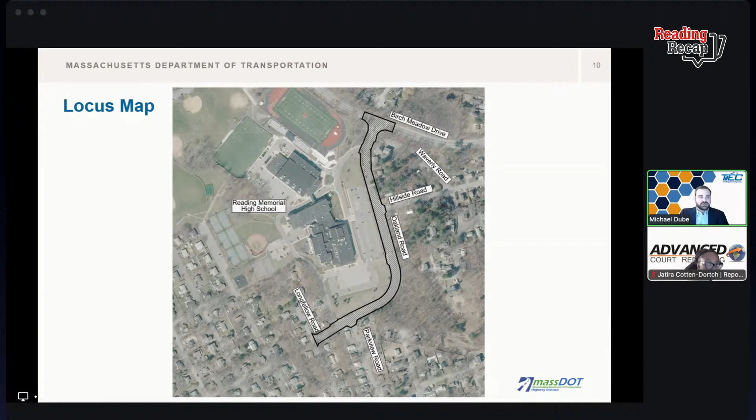The project begins at Longfellow Road in the south, and it extends approximately 1,700 feet along Oakland Road to Birch Meadow Drive in the north. The primary focus of the project is the area of Oakland Road adjacent to Reading Memorial High School.

Oakland Road today is a two-lane roadway with parking on both sides and sidewalks on both sides as well. The existing cross-section of the roadway lacks sufficient infrastructure for pedestrians and bicyclists, and there are excessively wide travel lanes which promote high speeds. Due to the on-street parking, poor sight lines for pedestrians looking across the roadway also exist.

The excessive pavement area also means there are excessively long crosswalks along Oakland Road. In addition, the intersections of Birch Meadow Drive and Longfellow Road lack logical terminations of pedestrian facilities at the project limits. At Birch Meadow Drive, there are also conflict points between existing crosswalks and vehicle staging areas that create additional safety concerns for students walking and biking to school.

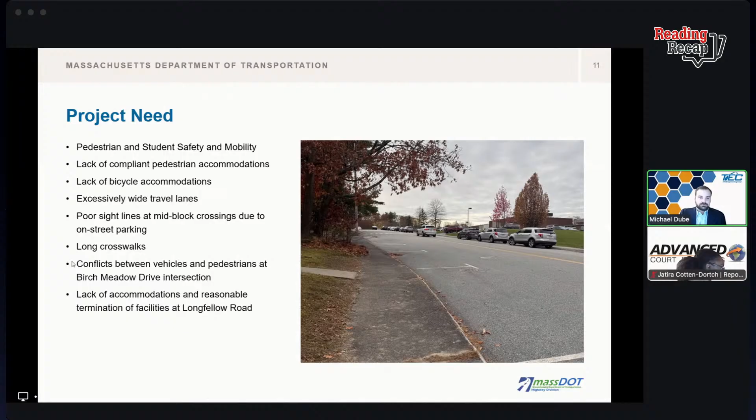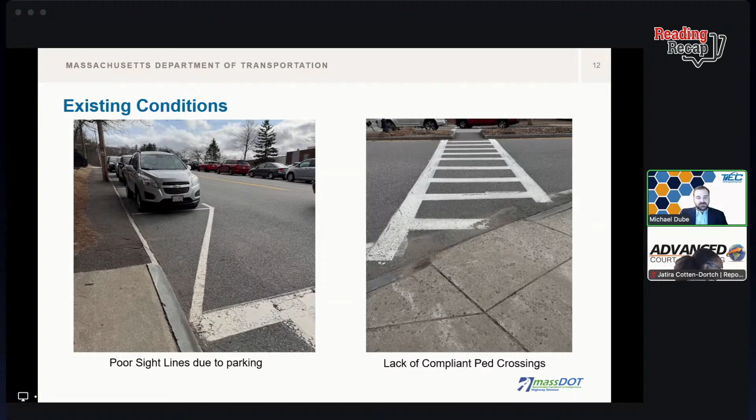So, understanding the purpose of the project and the existing conditions, what do we want to accomplish?

With this project, the overarching goal is to improve pedestrian and student safety and mobility throughout the project limits. We're looking to implement a complete streets approach that prioritizes pedestrians and bicyclists, including the installation of a designated shared use path for both pedestrians and bicyclists through the project limits and for access to Reading Memorial High School.

We're also making improvements to both the Birch Meadow Drive and Longfellow Road intersections that prioritize pedestrian and bicyclist movements and provide logical access points to the shared use path. I'll get into these in more detail on a future slide.

Finally, the project will provide improvements that connect to other recent improvements in the area, including complete streets improvements at Parkview and Birch Meadow Field improvements that Chris recently mentioned.

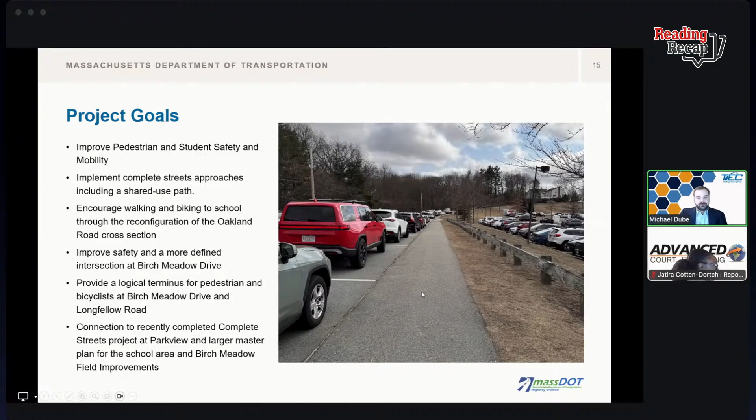So what do these proposed improvements actually look like, and how do they meet the project goals?

Proposed improvements include performing a road diet along Oakland Road and utilizing the additional space to install a 10-foot shared use path with a 5-foot buffer along the western side of the roadway.

The road diet will narrow the existing 16-foot travel lanes to 11 feet to promote slower speeds throughout the project limits. The existing on-street parking lanes will be maintained and striped to 8 feet wide.

The sidewalk along the eastern side of the roadway will be reconstructed to be ADA compliant and provide ADA compliant pedestrian crossings. The roadway will be resurfaced, and new pavement markings and signage will be installed.

Finally, the intersections of Birch Meadow Drive and Longfellow Road will be reconstructed to prioritize pedestrian and bicyclist crossing. The image below provides a representation of the roadway cross-section, highlighting what Oakland Road will look like after this project is completed.

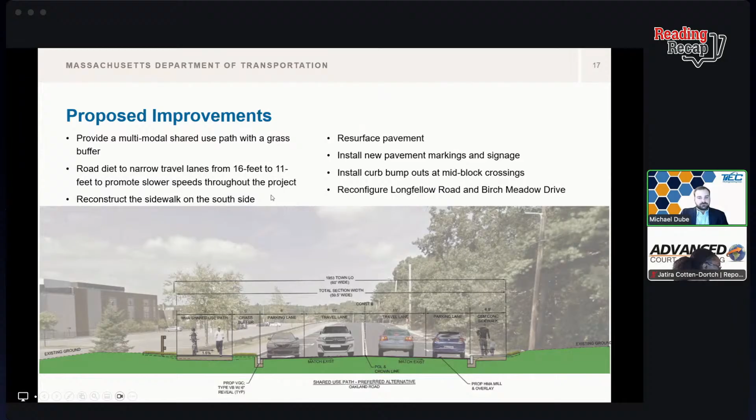Continuing along the roadway, we're providing minor modifications to the curb lines at all side streets to minimize crossing distances and provide curb bump outs for any crosswalks across Oakland Road. I'll leave this slide up for people to take a look at for a few seconds.

As previously mentioned, within this section of Oakland Road is Parkview Road, where new sidewalk and ADA improvements were recently completed.

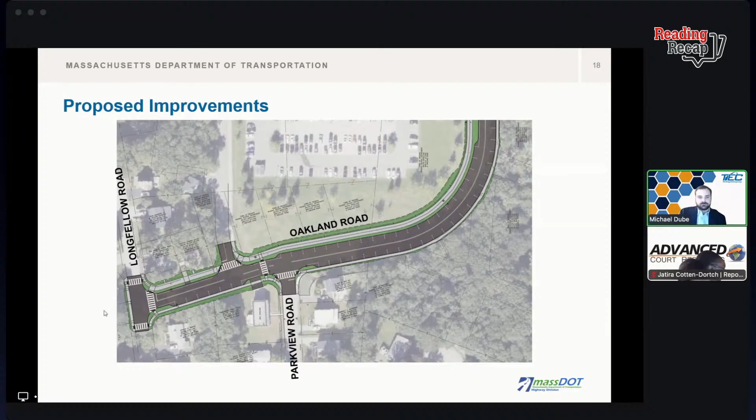Project limits terminate at the northern limit of Oakland Road, Birch Meadow Drive, which I'll speak to in more detail in a future slide.

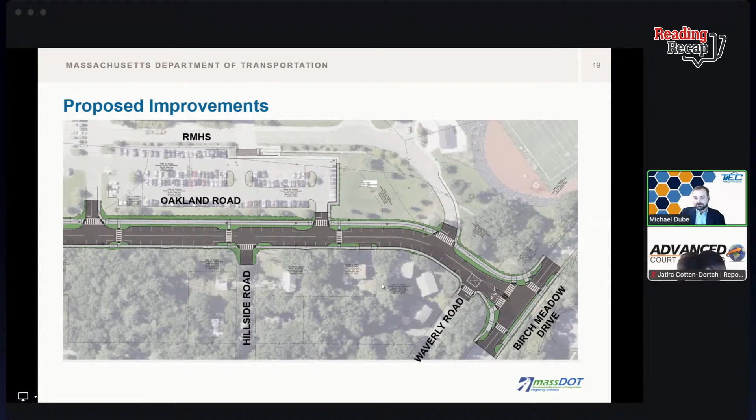The project is focused on bicyclist and pedestrian safety and mobility through the area. So the next few slides will provide some zoomed-in graphics of the specific improvements to reiterate how the proposed improvements meet the project goals.

This first rendering highlights the implementation of curb bump outs along Oakland Road. There are 4 crossings within the project limits and 2 additional crossings at Longfellow and Birch Meadow. This image shows the 2 crossings at the southern school driveway and Hillside Road.

Curb bump outs are critical infrastructure elements that improve sightlines between vehicles and pedestrians waiting to cross at these locations. The changes in curb lines help highlight the crossings for motorists, while also providing delineation for parked vehicles and staging pedestrians in front of these vehicles. The bump outs also significantly minimize pedestrian exposure to vehicle traffic by minimizing the lengths of the crosswalks.

Along this approach, there's also a defined two-lane section for both vehicles taking a left turn and a right turn. This maintains a similar condition as existing, and provides storage for both movements, understanding the benefits of this configuration for school drop-off and pickup and other events in town that utilize the high school.

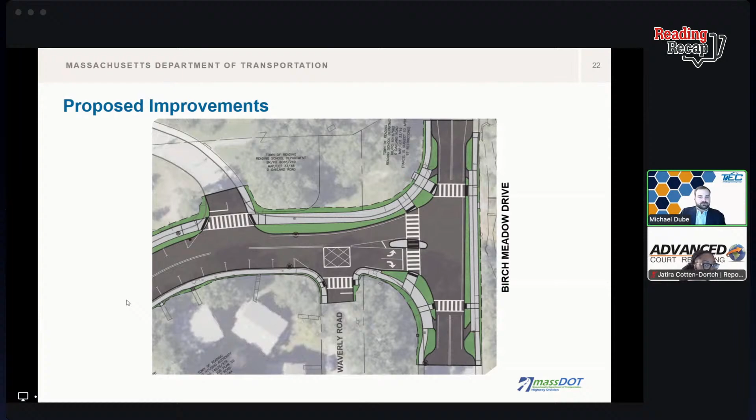At this time, I would like to turn the presentation over to Nancy Knight, representing MassDOT's Municipal Right-of-Way Community Compliance section, to discuss the property impacts of the project.

Thank you, Michael. When the Commonwealth, acting through its Massachusetts Department of Transportation Highway Division, indicated it would accept this project for funding, the Town of Reading accepted certain responsibilities. One of these responsibilities is acquiring the necessary rights in private and public lands for the design, construction, and public use of this project.

My function is to review and recommend procedures that the Town of Reading will use in acquiring these rights. The procedures used must comply with both federal and state regulations. Affected property owners' rights are protected under Mass General Laws, primarily Chapter 79. And because this project is receiving federal funds, the property owners' rights are further defined under Title III of the Real Property Act of 1970, as amended.

The 25% preliminary right-of-way plan submission indicates that the project requires 0 fee acquisitions, 15 permanent easements, and 16 temporary easements. Please understand, however, that right-of-way plans are subject to change as the project design progresses.

The property owners impacted by this project will be contacted by Town of Reading municipal officials, who will present the proposed impacts to each owner and discuss the methods by which the needed rights for the project may be acquired. Frequently, municipalities will appeal for donations to minimize the acquisition cost for the community.

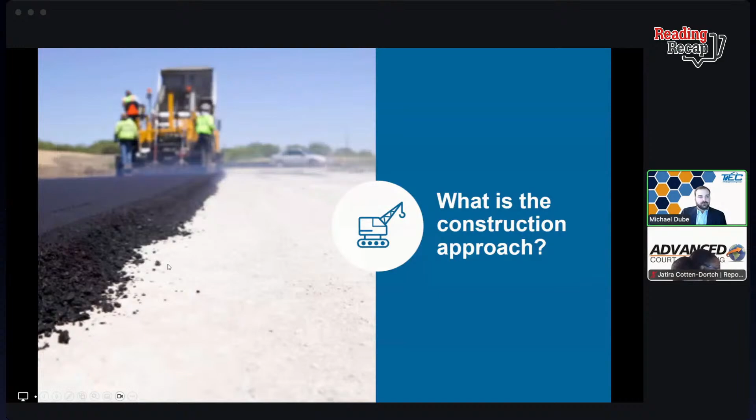Now looking forward to when this project will be constructed. The project is anticipated to begin construction in 2027, with the majority of construction happening during the summer months to minimize impacts to the school.

During construction, access will be maintained to all residences, although short-term closures will be required to complete sidewalk and driveway work. Similarly, short-term travel lane and parking restrictions will be required to complete work within the roadway. All lane modifications and short-term closures will be closely coordinated by the contractor with the property owners, Town of Reading DPW, and the police department. At the end of each workday, the lanes will be reopened to reestablish normal traffic patterns.

A MassDOT full-time resident engineer will be appointed to the project and will be on site. It's also worth noting that night work is not anticipated for this project.